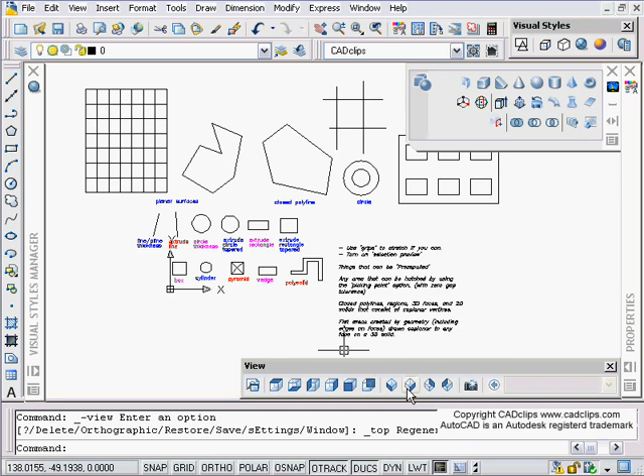So I'm just going to go to a diagonal isometric view, and I've got some basic primitive shapes in here that I've used these tools up over here to create some of these. And then from my previous lesson, I've extruded a rectangle and extruded another rectangle, and I should have tapered that. You can taper that circle being given a thickness, and just some samples of when we go to use our press pull, and don't get it mixed up with extrude, similar but not quite the same, the press pull tool.

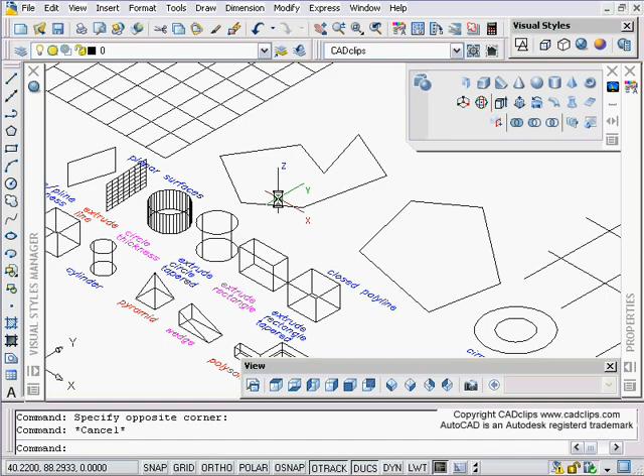And we've got a new object here, some planar surfaces that we're going to create, and this is a polyline that we're going to turn into a planar surface. So I'm just going to take a look at my notes here. First of all, use grips to stretch if you can. And what I'm talking about here is we have some primitive objects over here. As long as we don't press pull them or extrude them, we can use our grips here to stretch the shapes of these quite easily in 2D or in 3D.

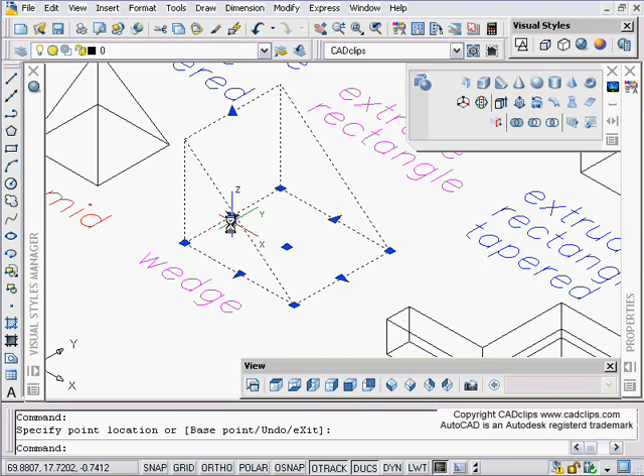So I can go back while this is still a wedge, and I can click on here and do all kinds of neat stuff and whatever is available with that particular primitive object. Okay, or even something that's been extruded. Okay, this has been extruded. Grip on here and you can stretch this stuff around. We have different shapes. We have a polysolid. We can do different things with a polysolid.

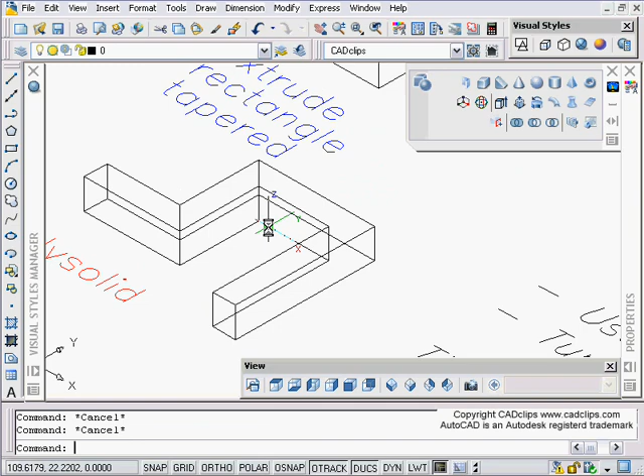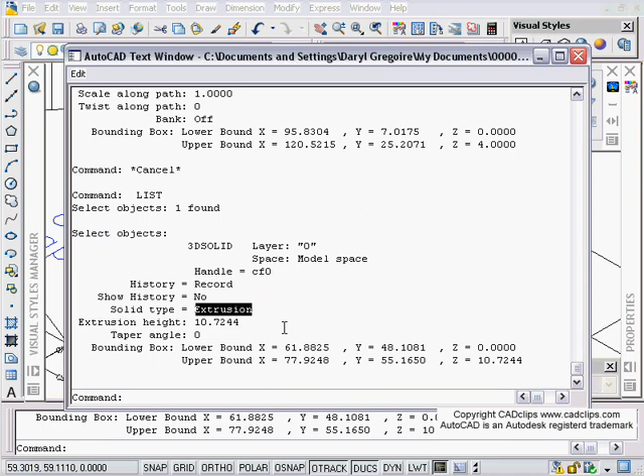Once we go in and use our press pull, you'll notice that if I list this, it lists as a 3D solid. If I list this, it's a 3D solid, and it's called a wedge. Okay, we saw this in the previous one, 3D solid, and it's a sweep. Just take note of that. If I list this, it's a 3D solid and it's just an extrusion. We're going to see something else in a minute. Again, we list this, it's a pyramid, and it is a 3D solid.

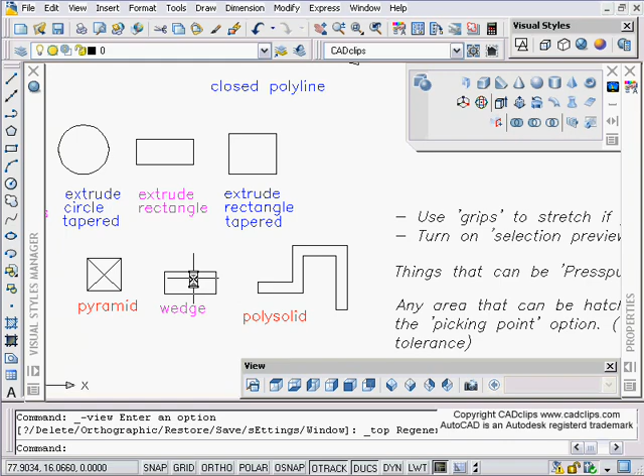Okay, so now when we go to do our press pull, first thing is use the grips as indicated, as much as you can before you go in and start press pulling, because once you press pull, you'll lose the control and the grips of that primitive object. Turn on selection preview when you're doing your press pull. So when you do your press pull, you'll notice that if you go down inside of here and you start your command, you're going to hover over these edges.

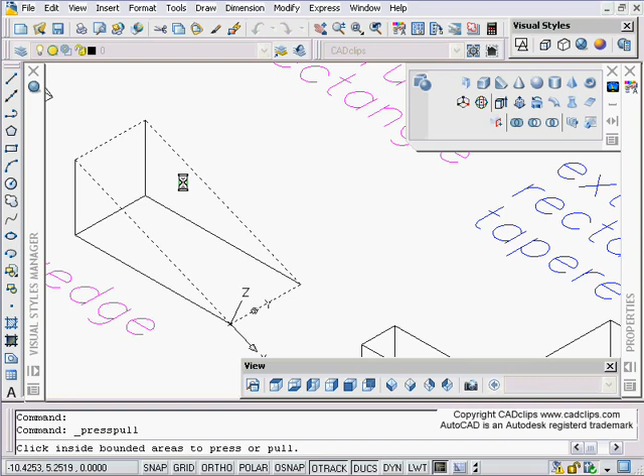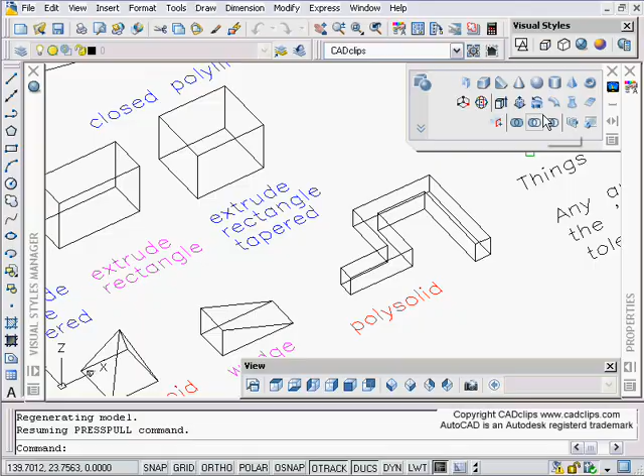Well, if you don't have selection preview turned on in your options under selection, then these edges won't preview, and sometimes you might have to swivel around with the shift middle mouse button to get that other side. If you can't get the side you want, shift middle mouse button will let you swivel around and grab the sides you want. I'm still in the middle of my press pull command. I started the command, and then shift middle mouse button allows me to transparently move around my object and zoom in and out with the wheel while still remaining in that command.

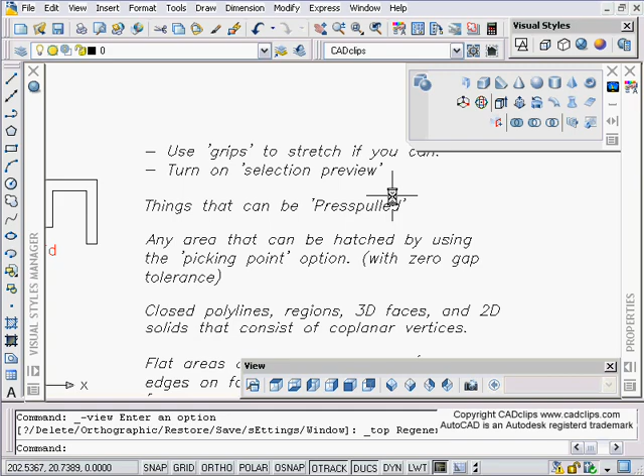Okay, so that's just a couple of notes before we get started. So turn on selection preview in your options. Things that can be press pulled: faces and stuff. Any area or flat area, it has to be a flat area that can be hatched by using the pick point option with the 0 gap tolerance, can be press pulled.

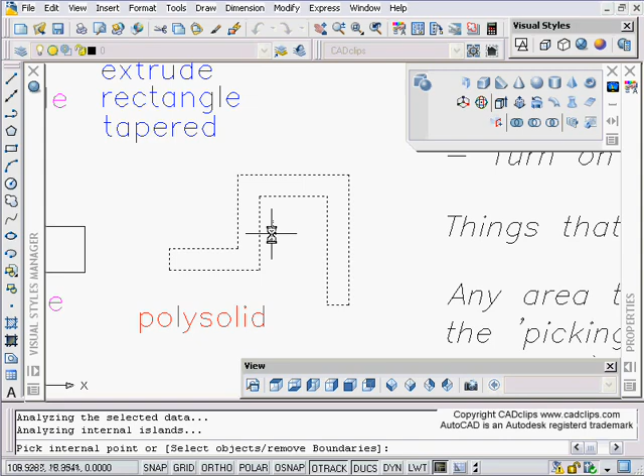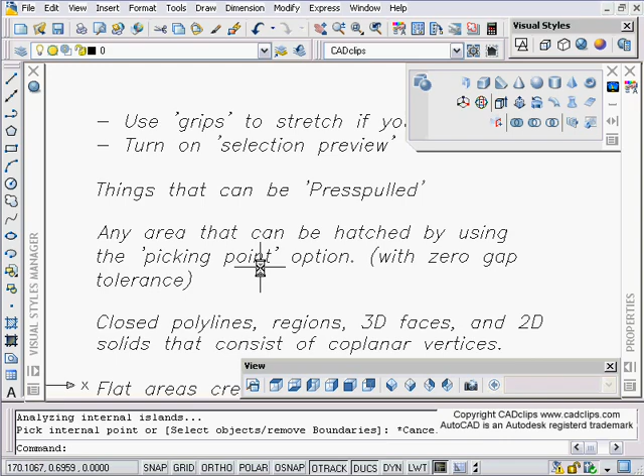So if you can hatch it by using the pick point option, you know, when you go in and hatch, I can type in H, pick point, and if I can pick a point and it recognizes that, then these can be press pulled. So one of the similarities is if you can hatch it by using the pick point option, then you can also press pull it.

The other things you can press pull are just a closed polyline. We've got some objects over here, some polylines and circles and stuff, and just basic rectangles. You can also press pull those, but it has to be a closed polyline, which is, if we do our rectangle command, that is a closed polyline. Circles can also be press pulled, more or less like an extrusion.

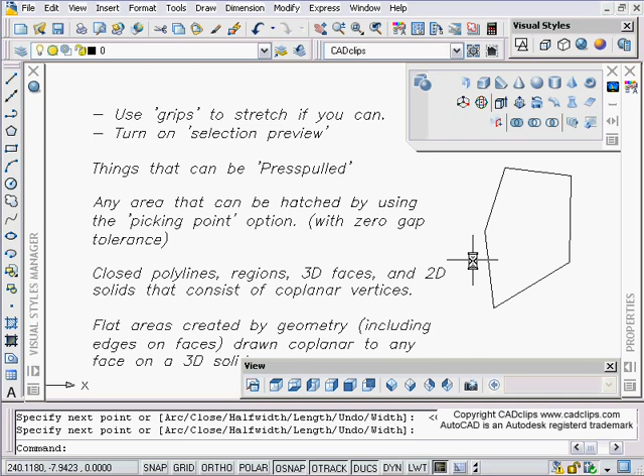And if you have a polyline that's not closed, if you work your way around and instead of saying close you just pick the endpoint and hit escape, that is not a closed polyline. You have to click on that, go to the properties, go down here where it says closed and say yes. And now it's a closed polyline, and now you can press pull that object up to where you want.

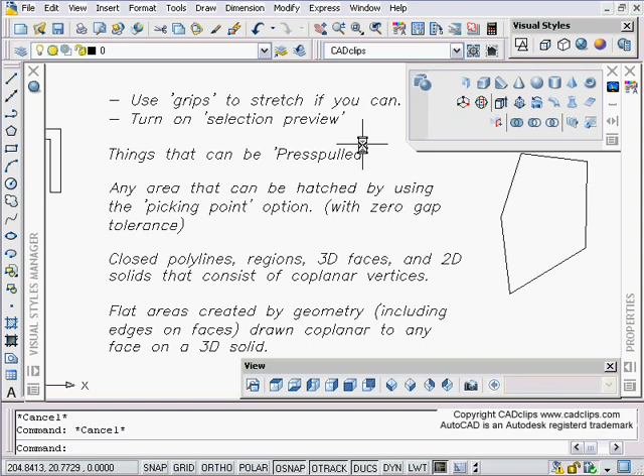So closed polylines, regions, 3D faces, 2D solids that consist of coplanar vertices. We'll see all of these, all things that can be press pulled. Flat areas created by regular 2D geometry, like lines, arcs, and circles, or geometry that's drawn on the face of a 3D solid. So we're going to see all of that right here. Let's just start up here. We can also use a block too.

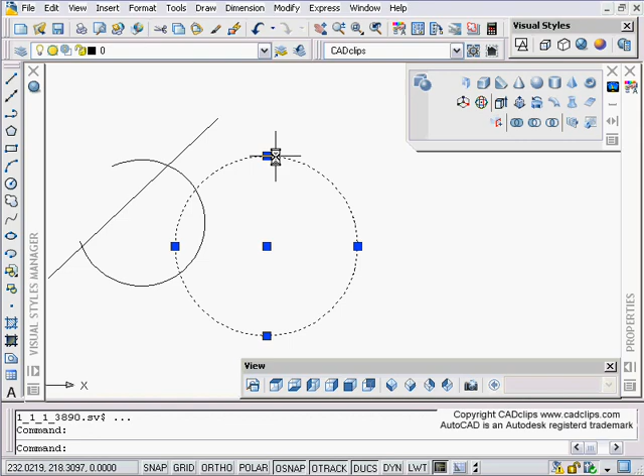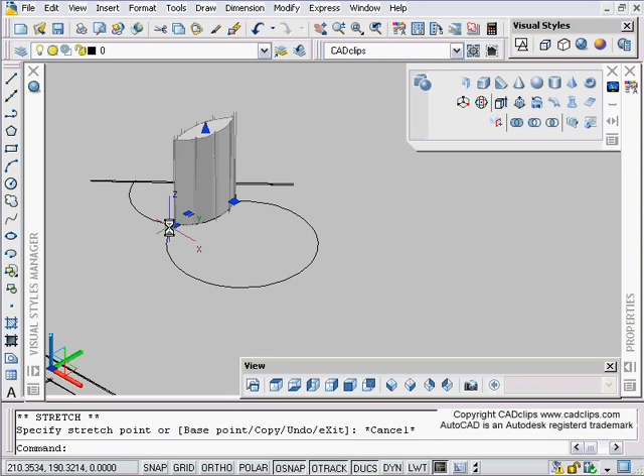Over here I've just got a circle, an arc, and a line. I'm going to look at that in my 3D view, maybe change over to my cool conceptual view here. Now I'm going to use my press pull, hover over that middle part, and I can press pull that up. Once I do it, I click on it, I can click my grips, I can move it around. Have a look. Okay, I'm going to undo that back.

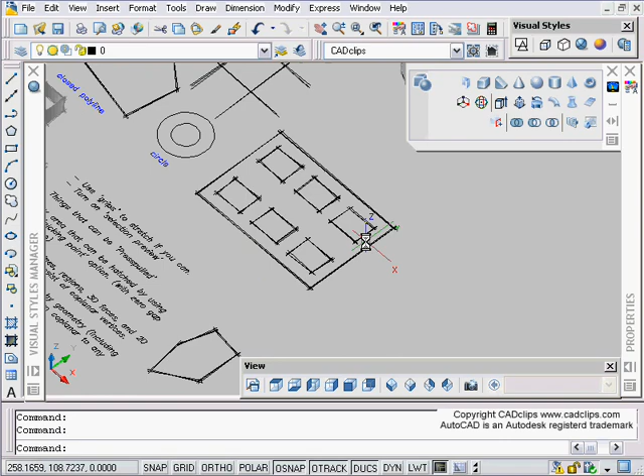Undo. Then I can say press pull. Maybe I'm going to press pull this part up, or maybe only this part up. Shift middle mouse button. Same thing over here, I've just got some rectangles, that's all these are. I can say press pull, hover over here, press pull that up. Is that cool or what? Could have used this a long time ago.

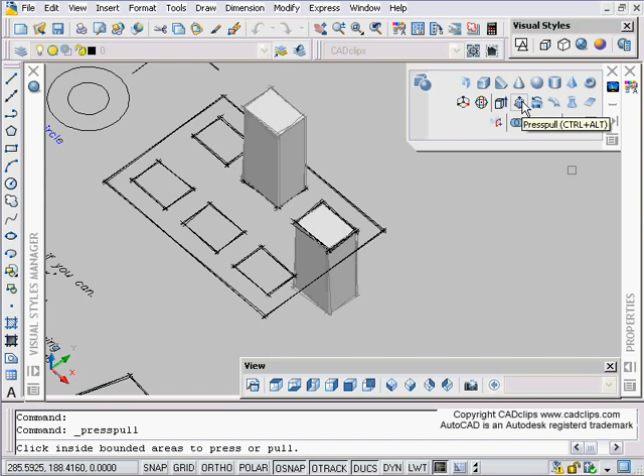Or I can press pull this guy up, or press pull this guy down. I can still go back, press pull, grab all of these, bring them up, and then grab that one guy that was in here. Shift space middle mouse to toggle through, grab my grips, pull that one up. All starting from just regular polylines. Shift middle mouse button, hover over here.

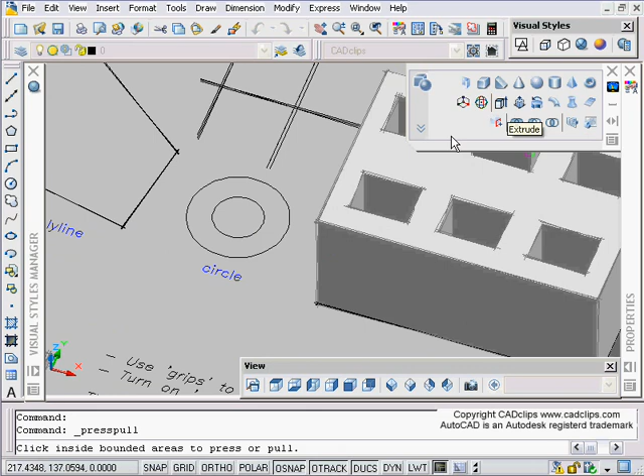We've got a couple of circles. Press pull, grab the middle one. Press pull, grab the outer one. That's just using regular 2D line geometry. Over here I've got a closed polyline. Press pull, click on here, bring it up. Now that I have that, I can say line.

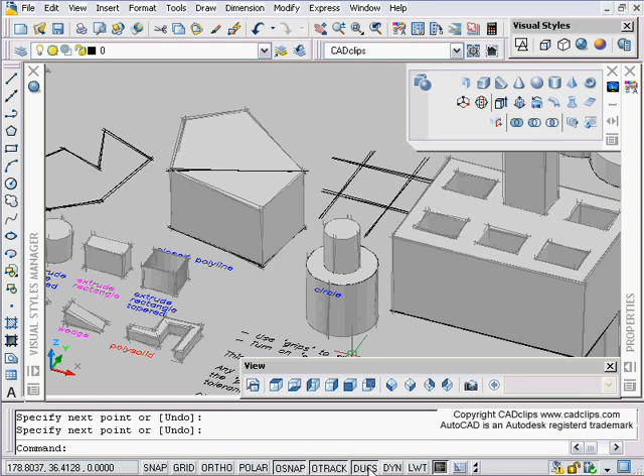I can draw a line, and I have to make sure I snap to those endpoints because it has to be on that surface, which is where our dynamic UCS comes in very handy. And now I can press pull that up. Using my dynamic UCS, I can hover over here and draw a circle on here. Then I can press pull, grab that, pull that out. Now I can draw another circle on maybe here. Am I pushing it too far?

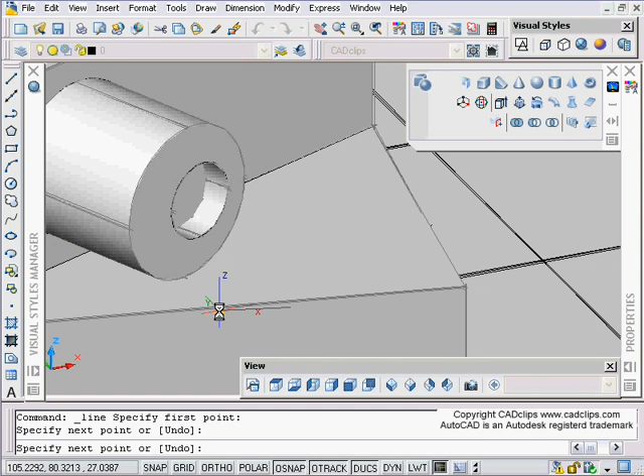Press pull, grab that little guy, push it in. Just like that. Shift middle mouse button. Anytime you want, you can start to draw a line on a surface. Regular line, but it has to be on the surface. Now that one I don't think went on the surface. Let's just move along here.

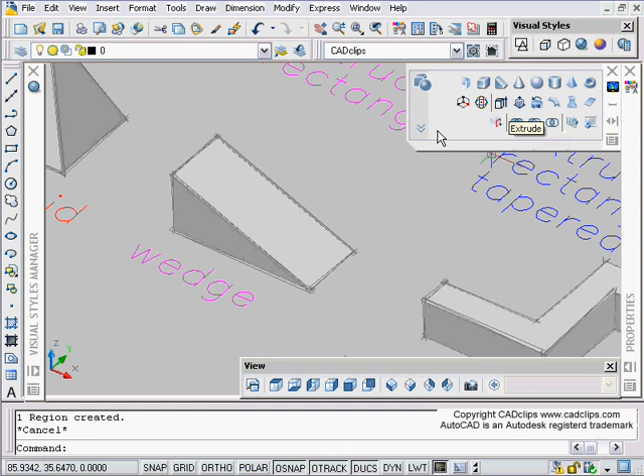Shift middle mouse button. Okay, here we've got a polysolid. No problem. Go in, press pull, hover over it, do what we want, etc. We've got a wedge over here. Well, maybe we're going to draw a line. We're going to make sure we hover over this to get our dynamic UCS working. And now I can say press pull, grab that surface, bring it up.

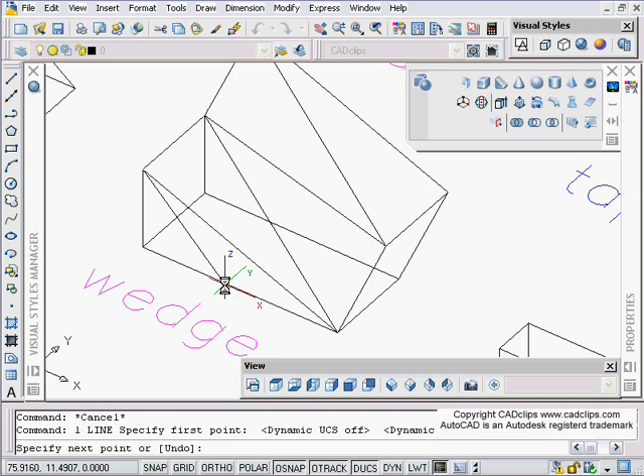Okay, draw another line from there. Notice the surface is hovering. When I go to draw that line, I type L. Notice that I'm picking the surface because my DUCS, my dynamic UCS, is on. If it's off, I can't draw on that surface. If it is on, I can draw on that surface, and then I pick there to maybe that midpoint. Press pull, click on this little guy, bring it out.

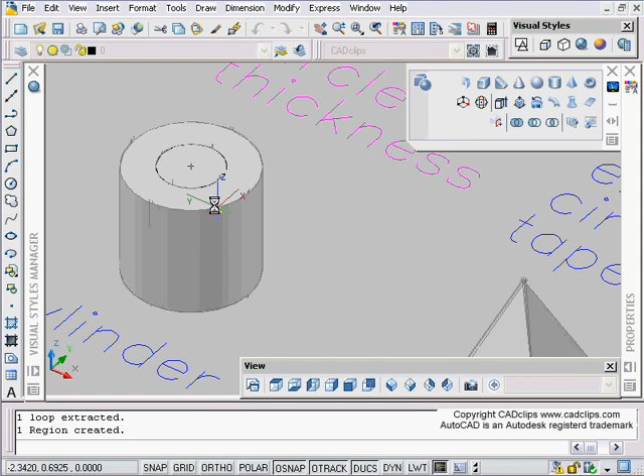It's really endless, the degree to which you can play with this stuff. Draw on any surface and press pull the object up. Cylinder, same thing. Okay, as a cylinder, it's fine. If you want to poke a hole in there, maybe we'll go in and draw a circle. And then we'll hover over here to get that surface, draw our circle, click on there, do a press pull, click in that little middle guy, take my snap off with my F3, drag down, shift middle mouse, I've added that in there. Okay, unlimited as to how you're going to do that.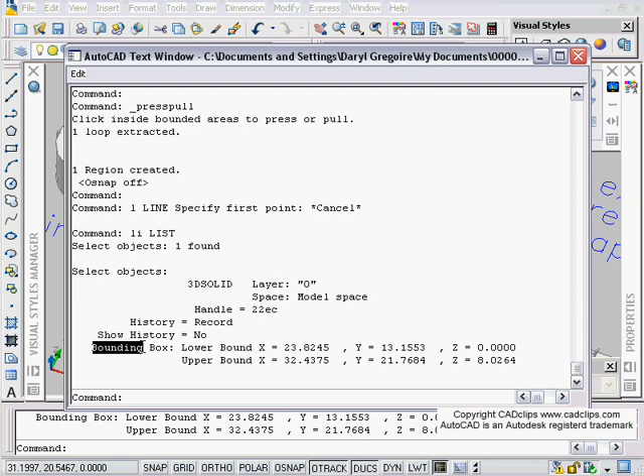Okay, now the difference is if I list this now, it's a 3D solid and it just says bounding box. It doesn't say it's a cylinder anymore. This still lists as a pyramid, see solid type, but if I scroll back, the previous one doesn't show that information, because it's a hybrid type object.

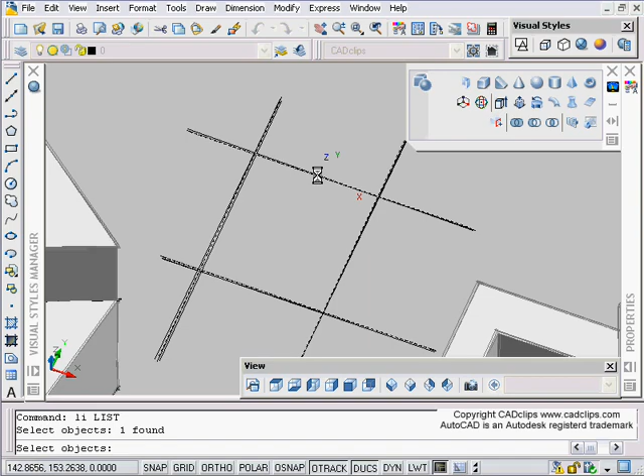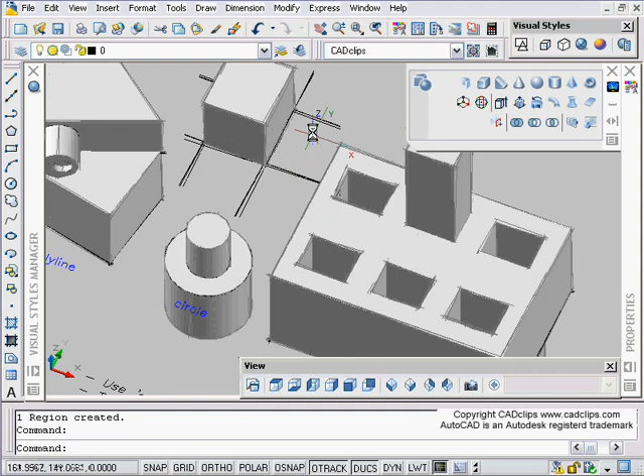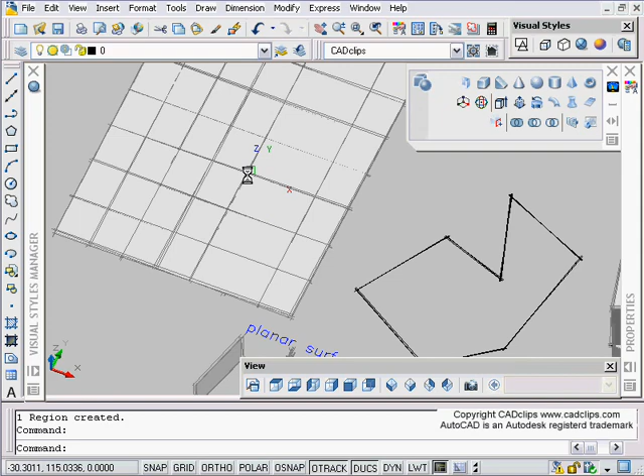Now this is a block. If I list this, this is a block, and the block name is just block 1, and it's made of lines, but guess what? Press pull. I can hover over that. Oh, I'm pretty sure you can. And grab that. So even 2D geometry that is part of a block can be press-pulled out. Okay? So blocks, 2D geometry drawn on top of 3D geometry, closed polylines, cylinders. Okay, this over here is a planar surface.

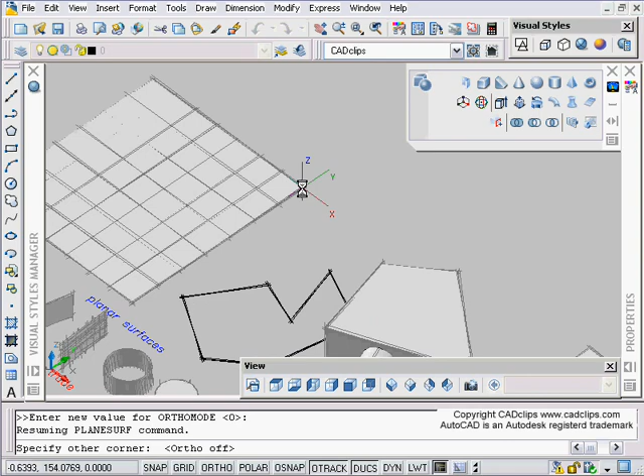Let's erase that. Draw a new planar surface we haven't done. When you draw a planar surface like this, I can use my shift middle mouse button here. Okay, make sure that your ortho is off. If you turn ortho on with F8, you'll notice it does weird things. So there's a tip for you. Planar surface, when you click on that, if you try to draw right now, I'm moving around, I don't see anything. If you take your F8, your ortho off, then your planar surface will work.

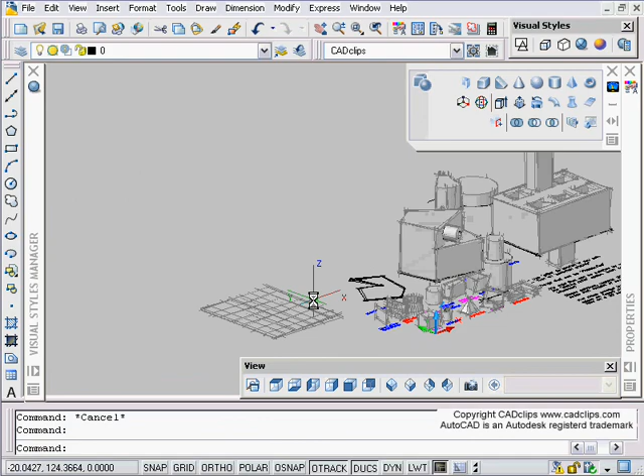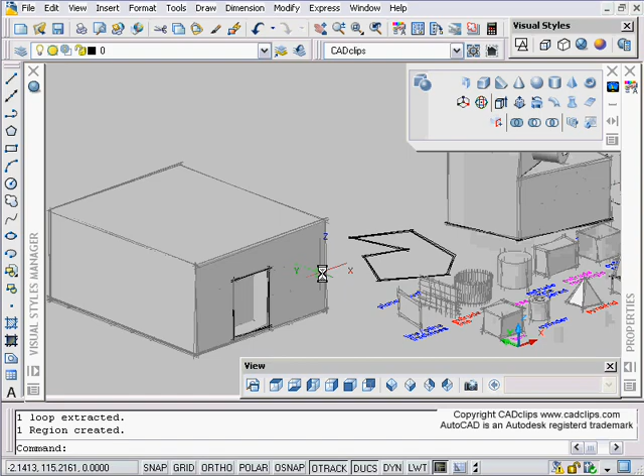Okay, now that we have that planar surface drawn over here, I can go down and use my press pull, hover over it, bring it up. Okay, very, very quickly we can start to draw some objects on there where we can very quickly create some shapes of whatever we want. We can fillet and round these edges and stuff, all kinds of neat things with our solids. We're just talking about the press pull. Okay, so lots of items.

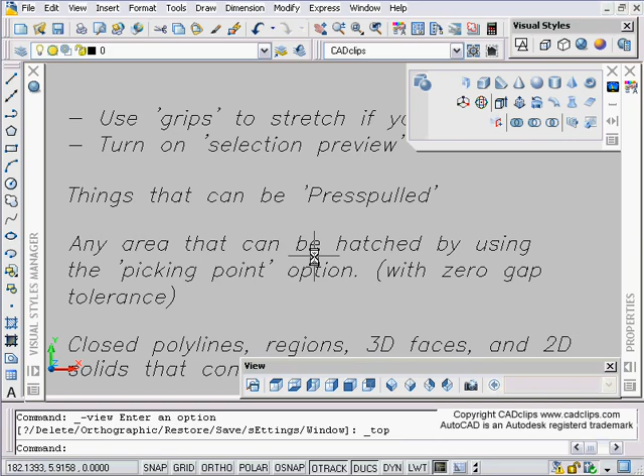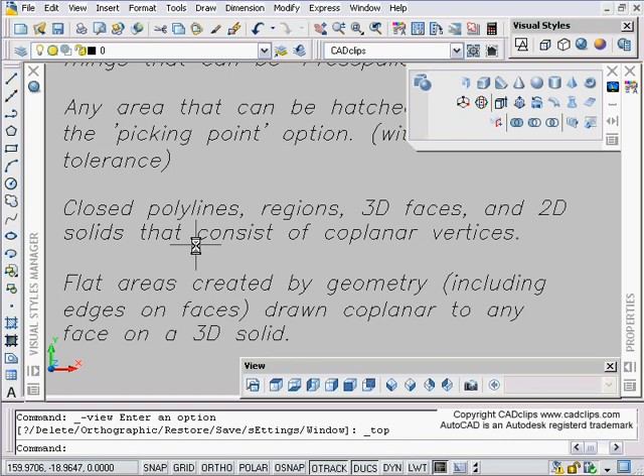So let's just have a look at our recap over here. Use your grips, turn on selection preview. Any area that can be hatched can be push-pulled. Make sure that it would have a 0 gap tolerance. Closed polylines, regions. If you draw a region, which is really a flat 3D object. 3D faces, surfaces, planar surfaces, 2D solids that consist of coplanar. So coplanar meaning on the same plane.

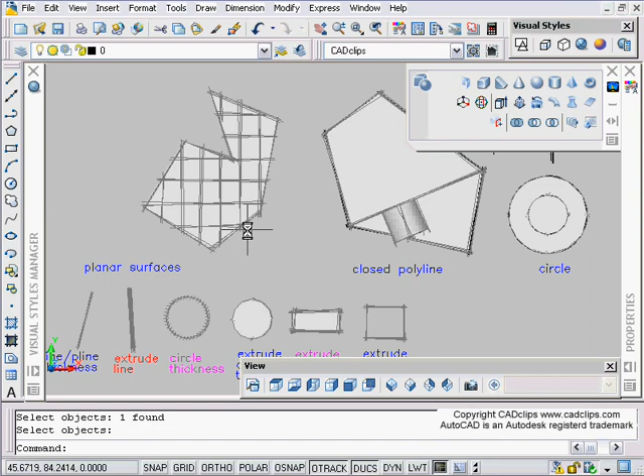Any flat area created by geometry, including 2D geometry drawn on top of 3D. So we're using our DUCS. Remember to take ortho off when you draw a planar surface. And then we can take a polyline and convert that to a planar surface by starting our planar surface. Hit O for object, pick on here and enter, and that turns it into a planar surface. And then we can go down to here from that polyline and we can push-pull that up.

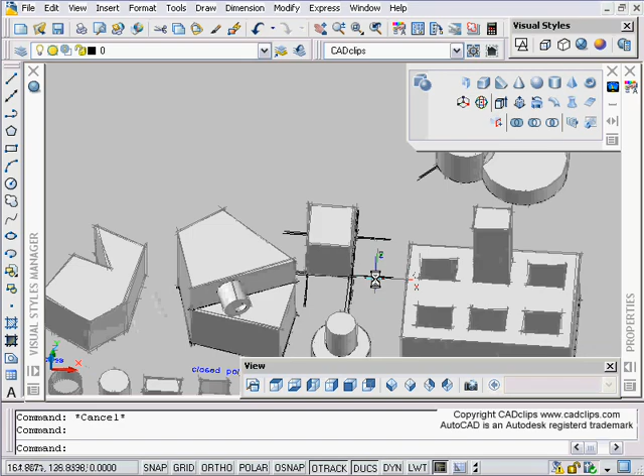We can also just push-pull a regular old polyline. We can push-pull an area within a block because that would be hatchable. Remember the hatch rule: if you can hatch it with a pick point, you can push-pull it. So there's some great tips, and I'm sure you can experiment with that and have fun with the new press pull. I keep saying push-pull. Press-pull command in our exciting new AutoCAD 2007 3D tools.